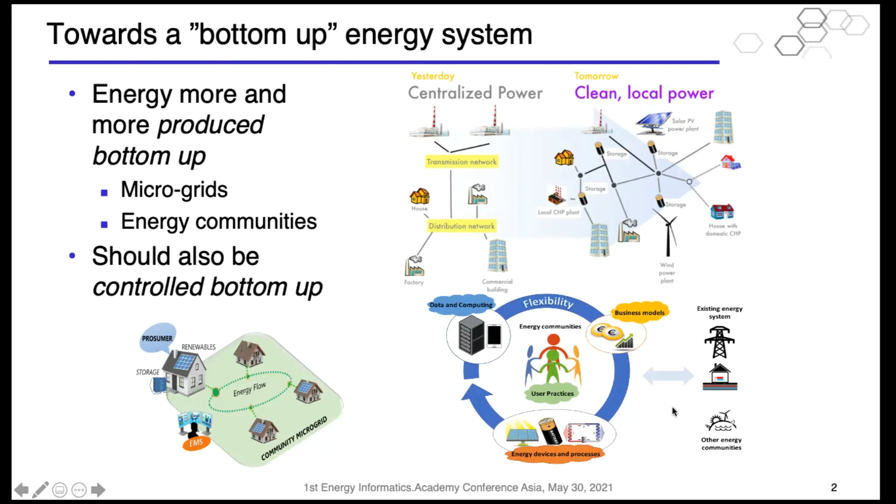So we believe that we should also try to control the energy system bottom-up, since that's more natural and thus more effective. So what we want to do here is integrate energy devices and processes like PV panels, batteries, heat, and so on, business models, data, and computing to support users and their practices. And of course, we all know that the key to this is flexibility. We also need to integrate with the existing energy community and energy system.

And if we do things the traditional way, what we often see in this domain is that, well, okay, we have one kind of device. Say we have a battery, and we want to optimize that battery for the spot market. Okay, then we build one system there. Then, if we want to optimize it for the intraday market or the reserve market, we build another system with modeling the battery, doing the optimization, doing the trading, and so on. So we get a lot of connections here, and each connection is a complex system.

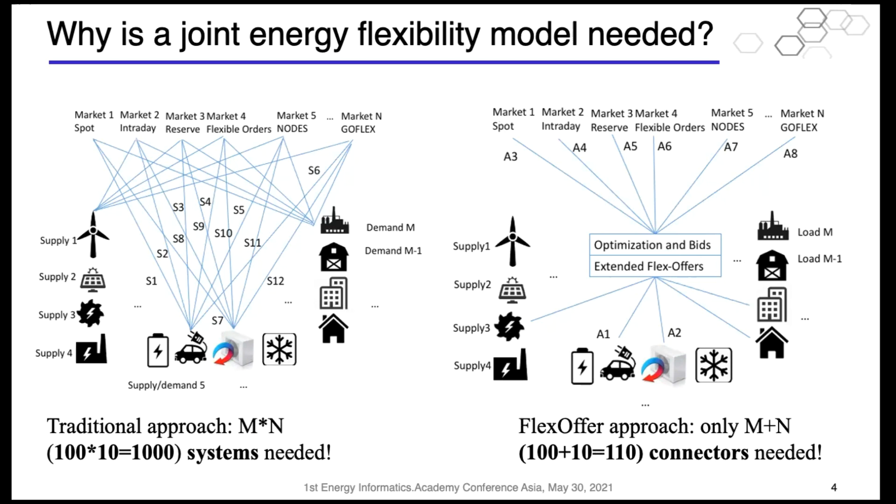So what is a good flexibility model? Well, first of all, we think it should be explicit. Traditionally, flexibility has been modeled implicitly. So if you have a price, you see what the response is and so on, but you don't know what the true flexibility is. We believe that explicit models allow capturing more of the true underlying flexibility.

Also, a good model should be general. It should capture all, or at least most loads, also complex loads with state dependencies like heat pumps and so on. It should handle energy production, storage, energy conversion, and so on. It should also be aggregatable and disaggregatable. So we should be able to take many smaller loads, like in the kilowatt hour size, aggregate them to megawatt hour size, do trading in markets and so on, and then disaggregate back to find out when to turn on and off the individual devices.

Also, because of this, it should be scalable. We should be able to aggregate thousands or even millions of loads very, very fast. And what we will see later is that if we have exact accurate models, we actually, by mathematics, cannot scale. So instead, what we think we need is good approximate models.

So FlexOffers is a joint model for all types of flexibilities. And devices have different flexibility patterns. Of course, the simplest ones have no flexibility. So a wind turbine produces energy when it produces, and when we want to watch TV, we watch TV. There's no flexibility in that. So then we just have a simple power profile here. Here we have hours, and we have the power or energy in these 1 hour slices. The 1 hour is just for ease of presentation. Usually we work at a finer 5 or 15 minute granularity.

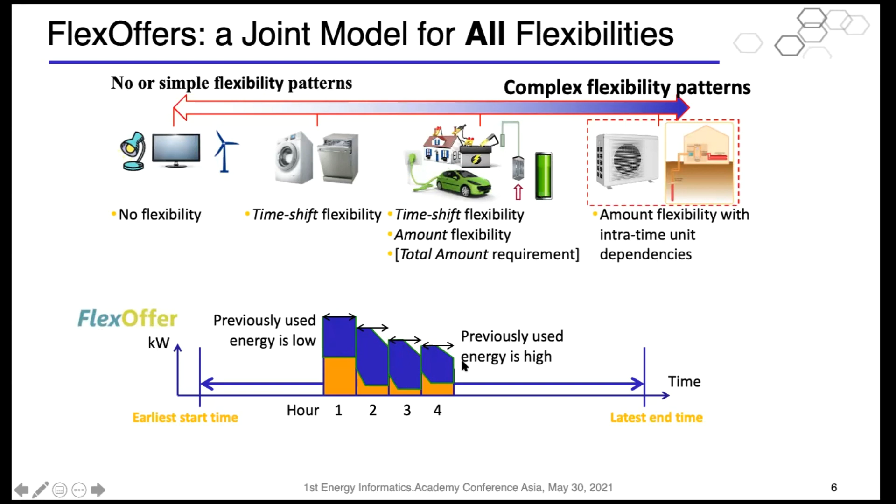Finally, if we have even more complex loads with intra-time unit dependencies, for example, a heat pump or other kinds of heating systems, then basically flexibility depends on what was done in the previous slices. So for example, if we have a heat pump, if we heat up a lot in the early slices, then we cannot keep on heating in the later slices, because then the house becomes too hot, and vice versa. If we turn it off, we have to turn it on eventually. So the flexibility in the later slices depends on what was done in the earlier slices. We also support this.

So let's have a simple example. A consumer arrives home at 10 p.m., wants to recharge their EV battery at the lowest possible price, or CO2, by 8 a.m. in the morning. Then 10 p.m. is the earliest start time, 8 a.m. is the latest end time, which makes 6 a.m. the latest start time. The consumer's local energy management system, flexibility system, generates a flex offer, which is offered to an aggregator or a market, and the negotiation with the aggregator is started, and this is accepted.

And then the buyer of the flex offer decides, okay, when do we put this? So when do we start charging so that there's a lot of cheap and green energy available and the grid load is low? So for example, at night. Later, we reward the consumer for the flexibility, perhaps month by month.

The flex offer has a well-defined model with a number of definitions and constraints that we see here. And it also has a well-defined protocol for which phases you must go through. First, you offer it, the utility or aggregator that you negotiate with will receive it, they can accept it, and so on. And if they accept it, then they have the right to schedule it. That doesn't have to happen immediately. They may also reschedule it and so on before it's finally executed, and later there's a billing phase.

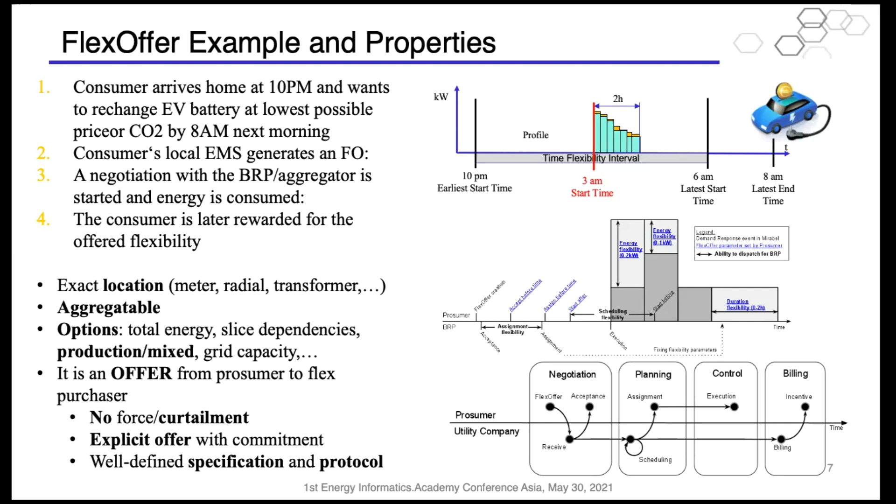And it's an offer. So there you have a flex prosumer with some flexibility that offers their flexibility to whoever wants it. So there's no force or curtailment here. But when you offer and someone takes you up on the offer, you also have commitment. We think this is the right way to do it.

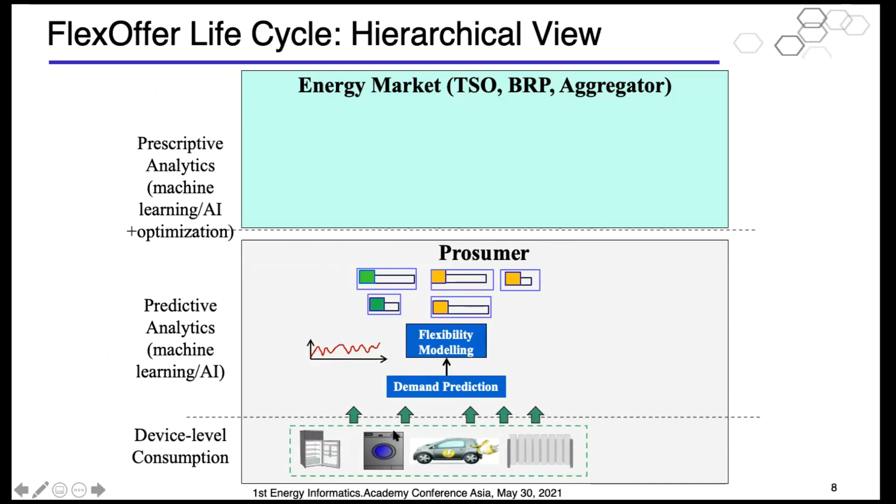So if we look at the hierarchical view, we sort of start with device level consumption data. Then by using that, we predict demand. We then model flexibility, so create individual flex offers for each of these devices down here. Then we take all the small Lego bricks and aggregate them into bigger Lego bricks. So the green ones here become this one, the orange ones become this one.

And then we have megawatt hour flex offers that can be balanced and scheduled by trading on the market and solving problems at grid level. Once we have placed the big flex offers, we can disaggregate and go down with schedules and see how we execute them.

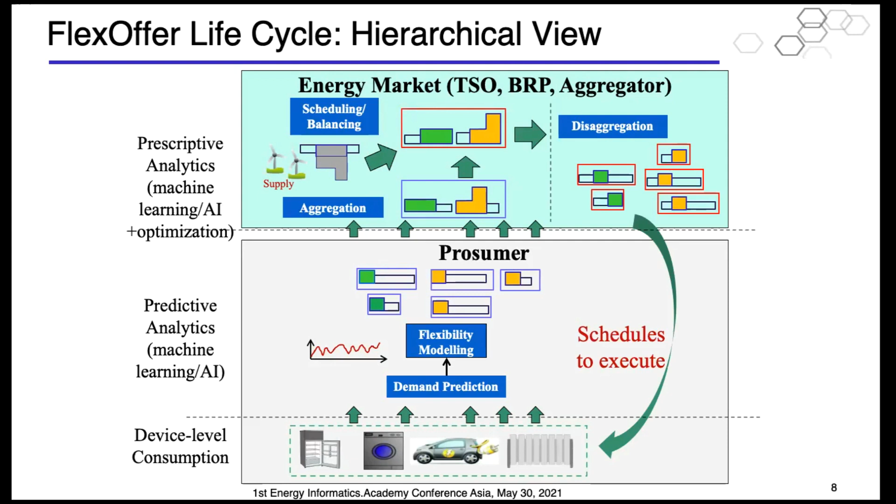Good. So if we look more at a process view, we have data from IoT devices. We collect the data, we do pre-processing, remove outliers, fill missing data, do some aggregation and so on. We do some predictive modeling with machine learning, do demand prediction, take in context like weather and so on, and use that to generate flex offers that we then aggregate, trade, schedule, and execute.

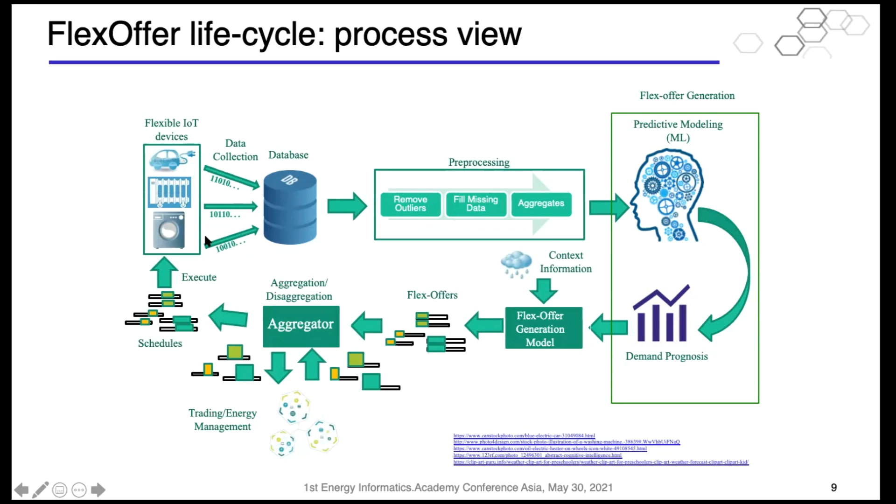So we use specialized constraints to characterize different types of flexibility, like the start time constraint, the energy amount constraint in each slice, the total energy constraint, also the dependent energy constraint. So how much energy do I need to use in this slice, depending on what I did in earlier slices.

For example, for heat pumps, we have an acceptance time constraint. So this is from my offer until you have to say yes or no, how many hours can I leave. And then later we have an assignment time constraint with this, how much prior to the actual execution do I need to know? So we can set all these things depending on our wishes and device types.

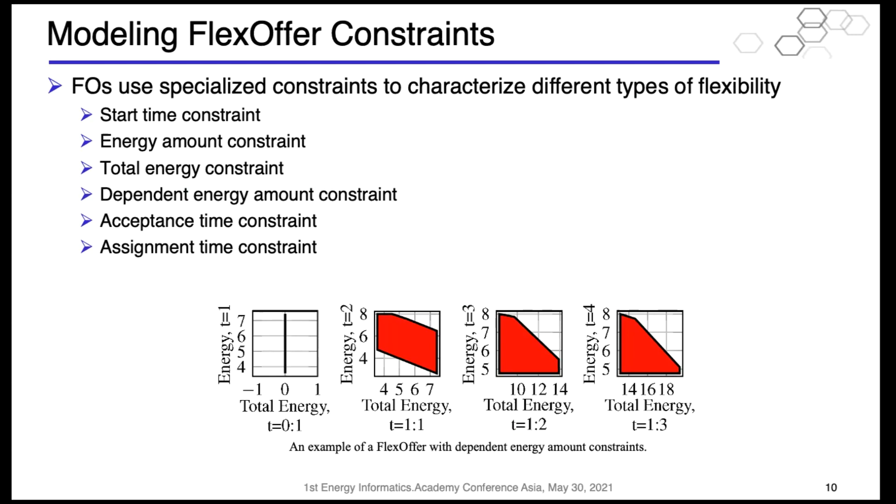So the general flex offer generation process is like this. We have time series and context information, we do data pre-processing, and then we basically try and extract the time flexibility and the amount flexibility separately because they require different techniques. Then we put them together again, and we have a flex offer, and then we can evaluate that in terms of models, in terms of economy, and so on.

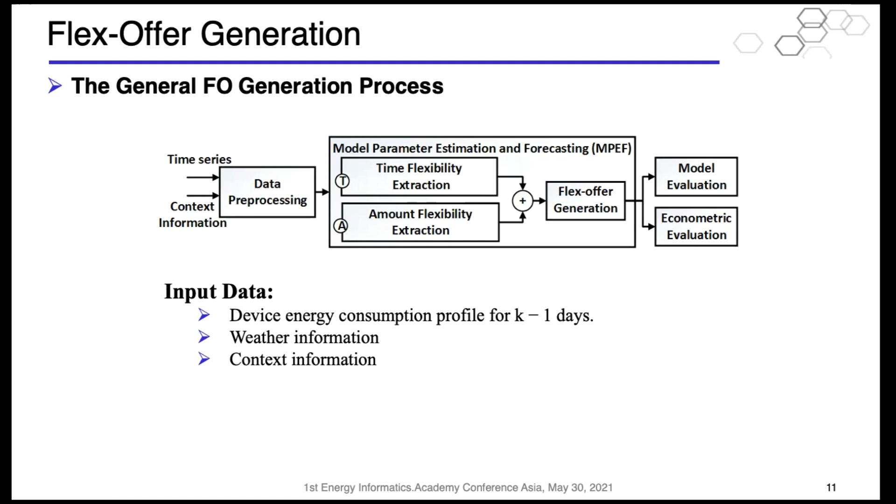So the input data is energy consumption profiles for a number of days and weather and context. Then we specialize this process for different types of devices. For example, for a wet device in a house, we need to forecast when is it actually switched on, when would the user typically want to switch it on, and then we can of course suggest to move it around. And once they switch it on, how long does it run for?

And then we can also estimate when is it turned on the next time, and what is the energy profile. And then the idea is that the time between activations, we can actually have some flexibility there, because the next activation is when the user would need to have their clothes or dishes, but we can then have some flexibility.

For EVs, we need to also do some domain-specific things. So we need to estimate when it's plugged in and what is the battery level. So we need to forecast when is it plugged in, when is it plugged out, and so on. And we need to estimate the battery level, how fast can we charge, how long do we have to charge, and the energy profile, and then we put that together in a flex offer.

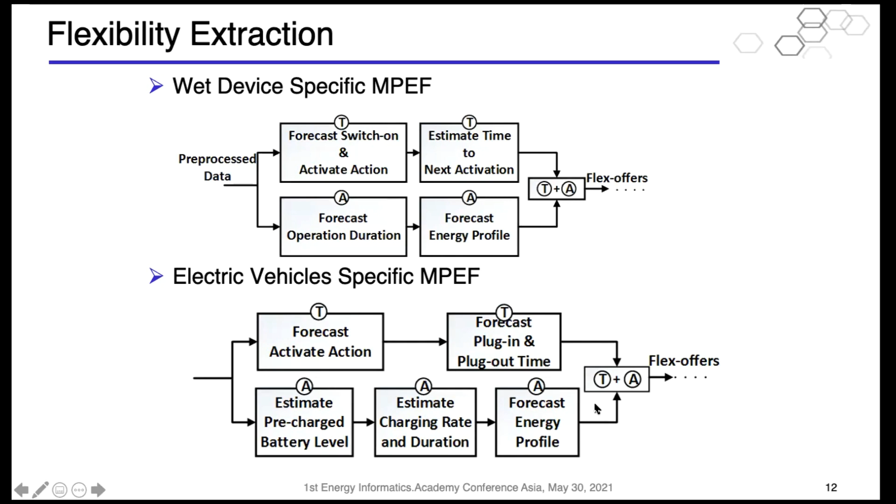For heat pumps, we again have to estimate some things, and basically a heat pump, you can think it's running all the time, so there's no time flexibility, but you can turn up or down the power in each time unit. So we need to estimate parameters and generate models. Then we need to do temperature forecasts: how much power, how cold is it outside, what is the sun, and so on.

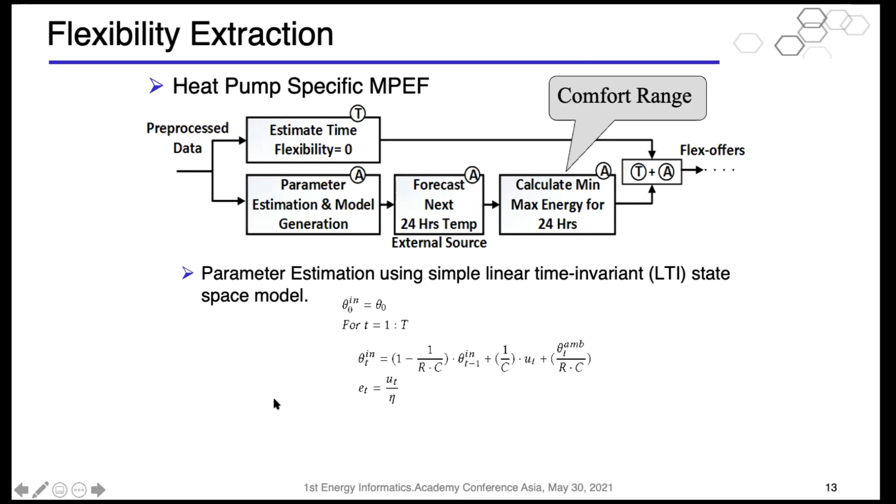Then we can make a flexibility model and calculate the min and max energy that we need for the 24 hours to stay within our comfort range, which could be 20 to 24 Celsius. And then we generate a flex offer. And we do parameter estimation using simple linear time invariant models like these.

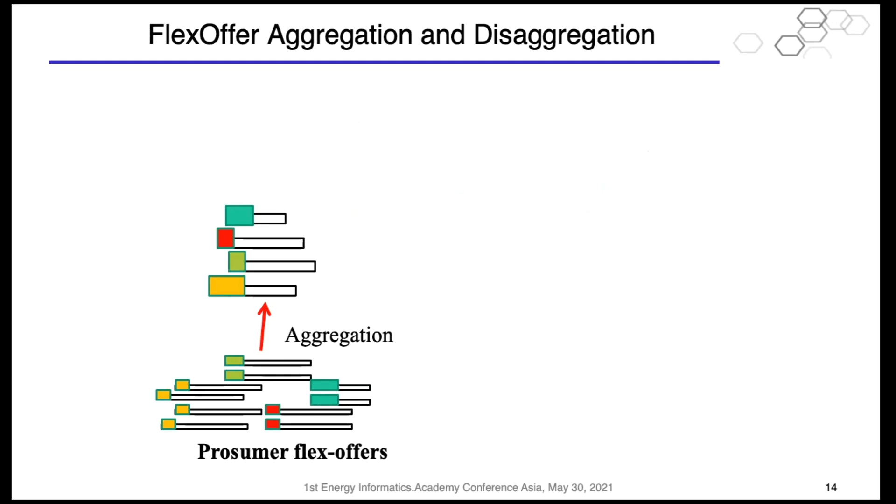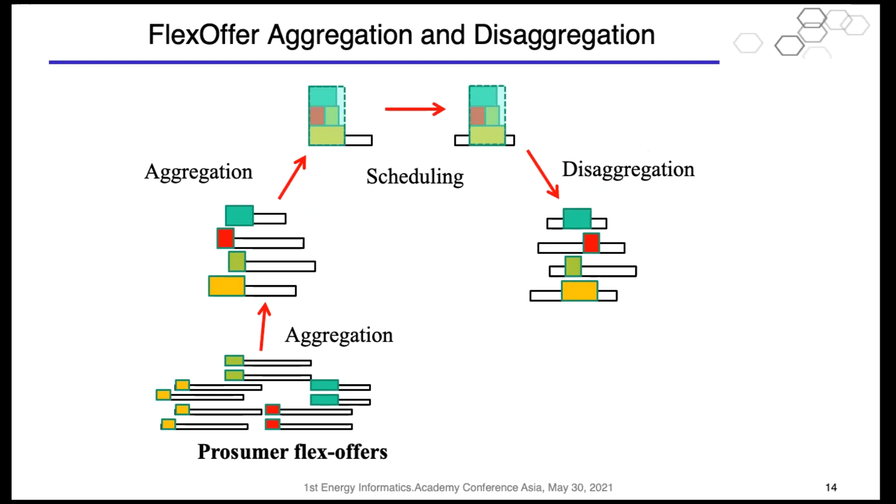Then when we aggregate, we start with small flex offers from prosumers, we aggregate them into larger ones, and we might even aggregate again. So this can be a multi-step process, aggregating within the prosumer, within the energy community, even at the district level and so on, at a BRP level, and then getting to a large offer that you can trade on markets and schedule and disaggregate again. So how do we do this?

So when we aggregate, we have a number of requirements. First of all, with aggregation we will actually tend to lose flexibility. So we want to preserve flexibility when we aggregate, because if you have two units that can move independently, if you put them together, you put them in lockstep, and thus you lose some time flexibility. But we want to preserve as much of that as possible.

We want to aggregate as much as possible, so going from having very many to having few large ones. And then when we aggregate, we also want to be able to disaggregate. We want this to be very fast; depending on the configuration, we have only a few minutes or even a few seconds to do this. And we want it to be very scalable and handle millions of flex offers.

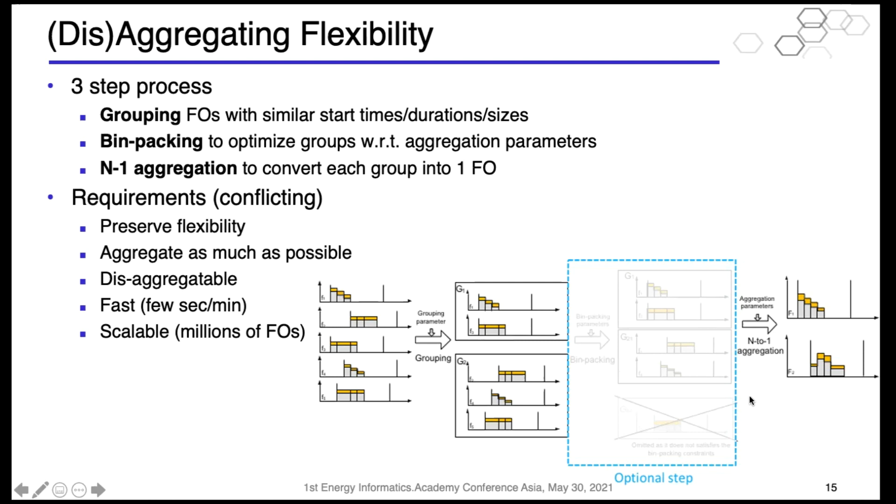Also, we can capture price information. So for example, we can capture a deviation price, what is the price of a 1 kilowatt hour deviation from the baseline. This can also be encoded into the flex offer. And basically, we can see flexibility as an asset that we can put a price on. So for example, we can say, okay, I can sell this flex offer every day for the next month, and then the DSO could buy it and use it to avoid grid congestion.

And then we can have dynamic prices based on when is it offered, where in the grid is it, what kind of flexibility is it. For example, if you have flexibility in a location in the grid that's very congested, then it's of course worth more than if you're sitting close to a transmission line with no capacity constraints.

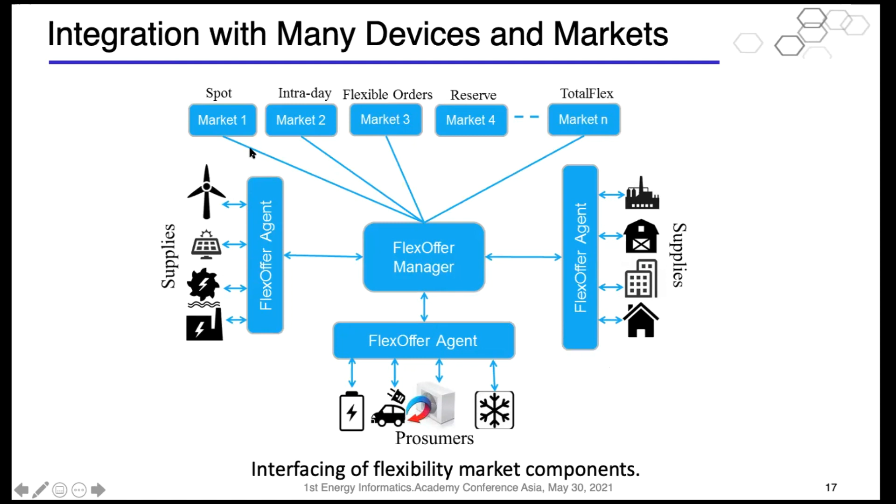And then we integrate it with markets in this way. So basically we have these agents that make the interfaces to the production, to the consumption, to the hybrid loads. We have a manager that can then aggregate and generate bids and so on, and then send out the bids to the different markets.

So key experimental results include these. Flex offers can be effectively generated from data, so it's not like we have to have a lot of manual work to generate this flexibility. Flex offer aggregation can scale, in the amount of flex offers and in long timesteps. For example, a whole day of 15-minute time intervals gives you 96 timestamps. Exact models like the LTIs we just saw, they don't scale at all. They have an exponential complexity and they cannot handle long time scales.

And basically the most advanced type we have is the one called the dependency-based flex offer, which allows optimization of tens of thousands of loads, captures a lot of flexibility, unlike the base flex offers that we had first, because they can do these inter-slice dependencies, can be efficiently aggregated and disaggregated, and can also be visualized. If we look at typical exact models like LTIs and polyhedrons, they capture a lot of flexibility because they're exact, but that's sort of it. They cannot scale, they cannot be aggregated and disaggregated, nor visualized.

And actually what we found out is that this process of first aggregating, then scheduling, and then disaggregating is faster than trying to schedule all the small loads individually, which is what you often see, but it also gives better utility, for example, in terms of balance prices, CO2, and so on. So it's actually a better process as well. And we have shown that aggregated flex from FlexOffers can be traded in several markets, and we can do optimizations for price, CO2, grid capacity, etc.

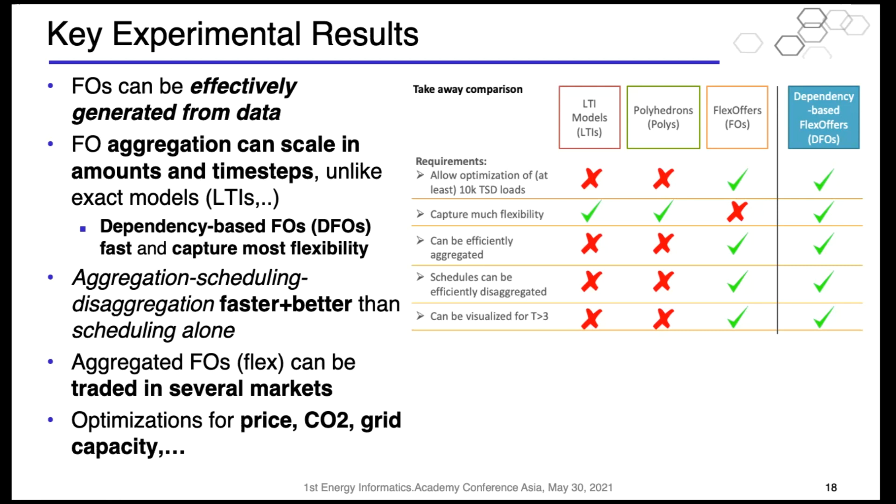So we have used this technology in more than 15 projects, starting back in the 7th Framework Programme and going on to Horizon 2020 and so on. You see a partial list here at the bottom right. One recent project that we finished, GoFlex, was the largest trial we had so far. Here we have 3 demo sites in Germany, Switzerland, and Cyprus. We have more than 500 prosumers in total, and we use this for industrial loads.

You can say municipal loads like water management and so on. We use it for electric vehicles, consumer loads, and so on. Something interesting we have in GoFlex is that we have an AI-based so-called distribution observability service.

So basically the idea here is that based on past data and using deep learning, you try to forecast when and where in the grid you will have a congestion, so that the DSO knows this before it happens and can then purchase flexibility to balance out that congestion. Also, we do automatic multi-objective flexibility trading to serve several purposes, including grid congestion, but also balancing and so on.

And basically, the German partner, Stadtwerke Wunsiedel, found that the value of this tradable flexibility on average was more than 6 euro cents per kilowatt hour, which is more than the electricity itself cost. And they would estimate that if they rolled this out full time, they would have 5 million euros extra gross profit per year for a rather small multi-utility. And for the hardware necessary to do the automation and so on, they found return on investment within 2 to 5 years.

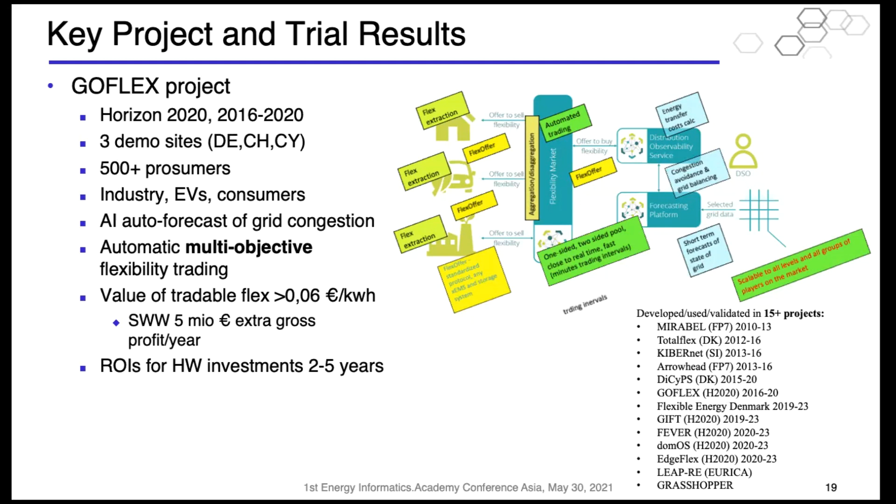In the spin out, we have made FlexShape. We have a number of projects. We have a solar predictor that can predict PV supply at any GPS coordinate for the next 5 days. We have a battery MPC controller that can optimize physical batteries or heat pumps. We have a mobile app that can predict and optimize residential loads through recommendations and automatic activations using 20 euro smart plugs.

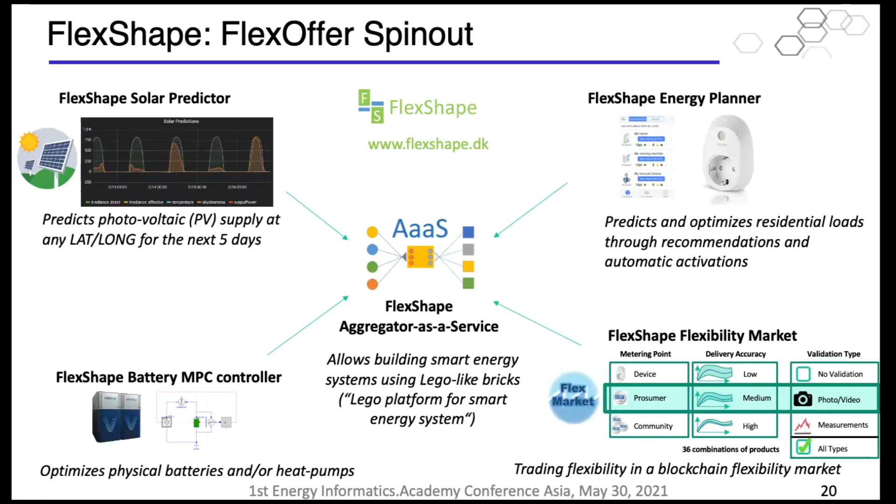We have a blockchain-based flexibility market where you can basically trade flexibility at a given metering point, at a given delivery accuracy, and a given validation type within a small market like an energy community. And finally, we have an aggregator as a service, which is like a Lego platform for smart energy systems, where you can take different systems and devices and plug them together and then have them optimized. So I hope that you find this interesting and would like to use FlexOffers.

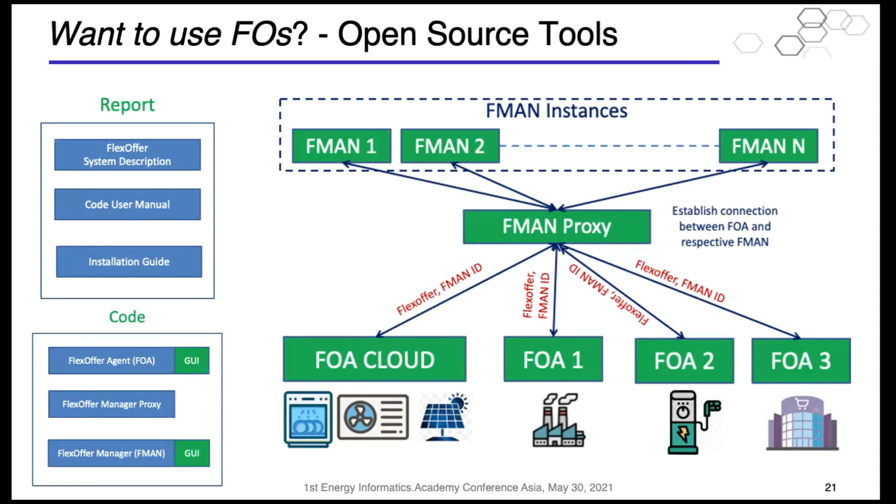And here we have some open source tools, with report and code. So basically, there are FlexOffers agents that can control various types of loads. There's also a cloud-based version that can control devices over the internet. And then we have a so-called flexibility manager, which is the one doing the aggregation and optimization. So the FlexOffers agent is the one connecting the devices to the FlexOffers manager.